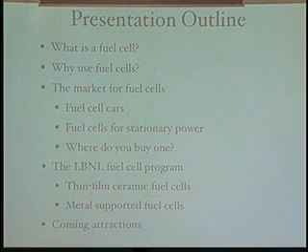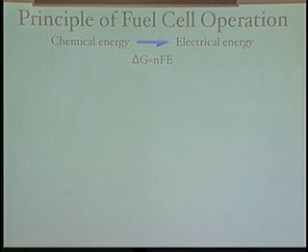So, principle of fuel cell operation. A fuel cell converts chemical energy to electrical energy, and you can calculate the voltage of a fuel cell based on the thermodynamic driving force for that chemical reaction. The basis of any fuel cell, and actually any battery, is some kind of an ionically conductive membrane that separates the two electrodes. That membrane can be solid, liquid, or polymeric. The large attention being paid to fuel cells right now in the press is largely focused on polymeric or PEM fuel cells, which are supposedly going to go into cars. We work on solid fuel cells, high temperature fuel cells here. These membranes will conduct either oxygen or hydronium - the PEM works on hydronium ions, and the solid oxide fuel cell works on oxide ion migration. And of course you need electrodes. The membrane separates the electrochemical reactions, and the electrodes do the charge transfer reaction. That's the fundamental basis of any battery or fuel cell.

Now you need a fuel, and where does that come from? Well, in fact, you can use a renewable. You can start with corn, ferment that, and get methanol and ethanol. Methanol and ethanol have a very attractive property, which is that they're liquid fuels. So people think about using methanol-powered fuel cells, for instance, to recharge the battery in a laptop or power a cell phone.

Okay, but really from methanol and ethanol, ultimately you get hydrogen, and then there's a whole issue of the hydrogen economy, which I'll address somewhat, and some of the problems with the hydrogen economy, and methane.

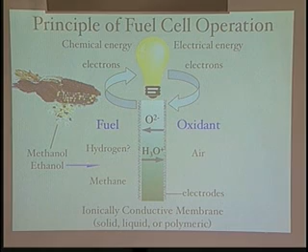The oxidant in the fuel cell is simply air. It's there, and of course it doesn't add any weight, so you've got the air for free. So you need these elements then, and of course you need an electronic path, which then will light a light bulb, turn your laptop on and do what it has to do, run your microwave oven.

Portable power. There are actually fuel cells now under development by a variety of companies. This is actually a German company—they have something called a smart fuel cell. This is a methanol-powered fuel cell. And here's a methanol-powered fuel cell running something like a PDA or a cell phone.

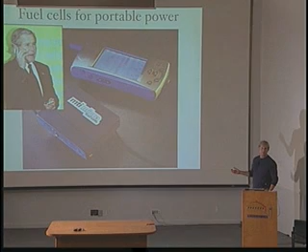And of course, we know that President Bush has kind of endorsed this kind of technology. Whether or not it's real is another question, so we have to look at that. Okay, how new is this stuff? It's not that new, okay?

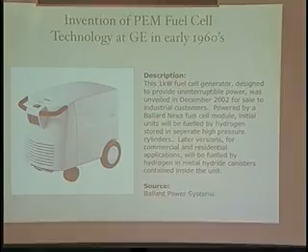So fuel cells for cars, this is it. This work started in the early 1960s at General Electric. And in fact, you can buy now a PEM fuel cell generator, and you can see it right here. This is produced by Ballard.

Interestingly, this is a 1 kilowatt PEM fuel cell. You cannot buy it yourself—they're only selling it to essentially companies, industrial users, corporations. And the reason is because this is still, I think, a very iffy thing, because if you look at the price, it's $7,000 for a kilowatt. And it runs on hydrogen, so none of us have hydrogen piped into our houses. So this is kind of still, I'd say, a demo—something that you install to show that fuel cells can actually do things.

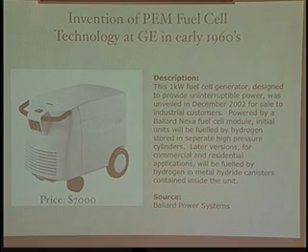Why fuel cells? This is really why we're looking at fuel cells. If you look at a combustion engine, the efficiencies aren't bad, but they're not great either. When you move toward diesels, you get higher efficiencies. And going further, for power generation, it's generally gas and steam turbines, and those scale up to the 100 megawatt size. So this is really also about the scaling of these things as you look at distributed or centralized power generation.

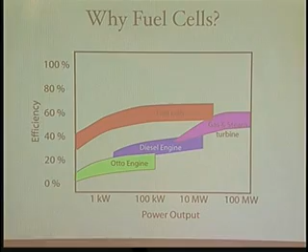And fuel cells have this very large advantage. One is that the efficiency can be much higher, and they scale well down to very small sizes, and they still are efficient devices. Now, the other thing about fuel cells that's very attractive is there's no moving parts, maybe a blower in some cases, but essentially no moving parts. And there's no NOx and no SOx because there's no combustion in a fuel cell, so hopefully there's also minimal maintenance. Now, these things are very attractive.

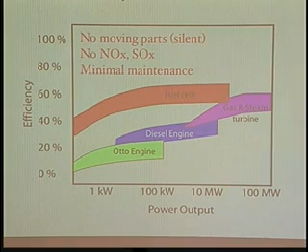Now, the other issue here is that this technology is entrenched, and it's got a very large market, and it's relatively inexpensive relative to what this stuff costs now. So for this to be real, it has to be more than just non-polluting—it has to be affordable, and that is the big issue.

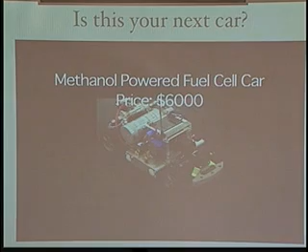So here's a car—$6,000, methanol powered. But as you'll see, it's pretty small. And that's $6,000. So there's definitely an issue here with things like methanol-powered fuel cells, and I'll tell you why these things are so expensive.

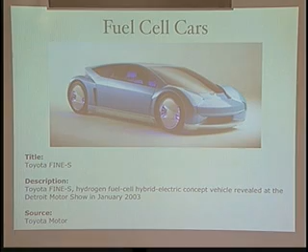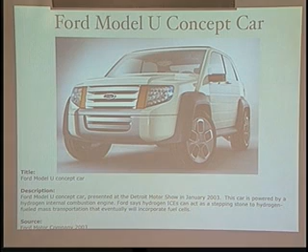So fuel cell cars, right? There's a lot of talk about fuel cell cars. This is actually a concept car revealed by Toyota in January 2003, and this is a fuel cell hybrid concept. Ford has got this—this is actually a hydrogen-powered internal combustion engine, which is also very non-polluting. And leave it to Ford, of course, to introduce a monster car functioning on hydrogen. But it takes a lot of kilowatts to power a car, and you pay a lot for kilowatts when you're buying fuel cells.

So let's see how that translates. Here's a Toyota Camry—it's about 157 horsepower, which is 110 kilowatts. If you look at just the cost of platinum in state-of-the-art PEM fuel cells, it's about $60 a kilowatt.

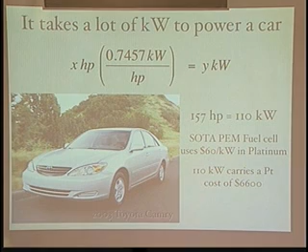That's just the platinum. That means 110 kilowatts is $6,600 just for the platinum, and this is about as low as anybody thinks they can go in terms of the amount of platinum required to do this job, to move these cars and get the kind of output you need. That's not system cost, that's not the membranes, it's not the stack and all the other things. In fact, the system cost is much, much higher. I'll show you what that looks like.

There's also talk about the hydrogen economy. The reason it's necessary for these cars is that they don't run on gasoline. You can't put gasoline into one of those cars because you really have to convert the gasoline to hydrogen, and that's a very complex and costly problem. So the push is, if we're going to have these hydrogen fuel cells in cars, we need a hydrogen economy so you can get the fuel to put in the car. There's a lot of money being spent on this, and there's actually development of infrastructure for hydrogen.

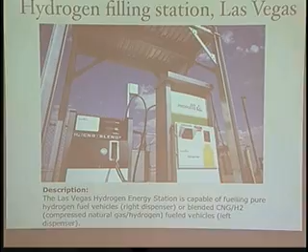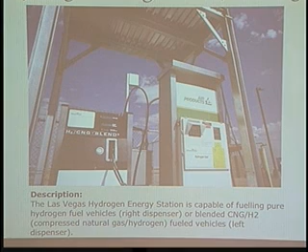Here you see, this is actually in Las Vegas, a filling station. It can dispense hydrogen or compressed natural gas and hydrogen to fuel cell cars, and there are going to be more of these going in the US.

Now, what about the hydrogen economy? You can't talk about hydrogen fuel cell cars without at least touching base on the hydrogen economy itself, which is going to see a lot of funding. But I think a lot of people have started to voice concern about this because of some very basic fundamental problems, just looking at the thermodynamics of hydrogen, the hydrogen economy itself. Ulf Bossel, who runs the European Solid Oxide Fuel Cell Forum, gave a talk last year, and these are in fact his slides. It's a very simple calculation.

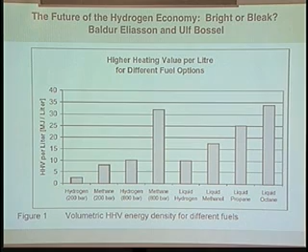If you look at the heating value per liter for different fuel options that could go into fuel cell cars, here's the problem. Here's hydrogen at 200 bars. Methane has much higher heating value, much higher energy content. But you look at gasoline, which is liquid, it's even better. This is liquid without any pressure, just at ambient pressure. Liquid propane, liquid methanol, but hydrogen is way, way down there. There's very little energy content per liter. It's a huge problem, and the problems get worse.

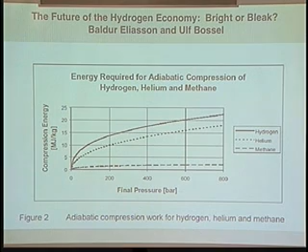If you try to compress it, or even liquefy it, this is the energy required to do that. For methane, the energy required to get up to 800 bars is not that bad, but helium and hydrogen are very difficult to compress. It's going to be very expensive to do this. So if you're going to carry around this compressed fuel, if you want to even call it a fuel, it's really a chemical. It's hard to call it a fuel because of these problems.

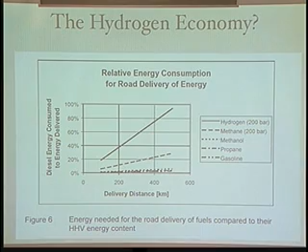These are problems that you can't overcome. That means you can't move hydrogen, basically, and it means that if you're going to use it, it has to be done on site at the filling station. That's a whole other issue, and you can't get around these problems because they're fundamental.

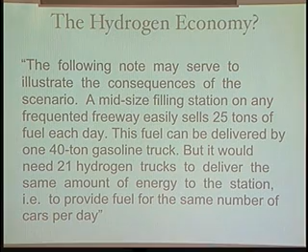There's another way to look at that. If you look at what goes on in the US and also in Europe, a mid-sized filling station typically will sell 25 tons of fuel each day. That can be delivered by one 40-ton gasoline truck. It would take 21 hydrogen trucks to deliver the same amount of energy. So it's a huge issue. The hydrogen economy is not going to happen overnight, and may never happen—a methanol economy maybe, but a hydrogen economy is a real problem.

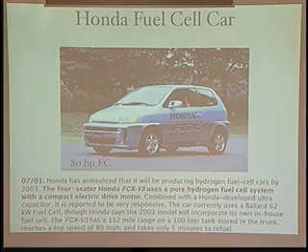Now, where could fuel cells go in cars where it might make sense? There's a lot of discussion about fuel cells being used for auxiliary power. What that means is you have an internal combustion engine, or it could be a hybrid, and you use the fuel cell somewhere back in the trunk. This is actually being looked at by BMW and Chrysler Daimler — a small fuel cell that when you're idling would produce power for the air conditioning, power electronics in the car, and navigation. That makes sense because when you're just sitting there, you consume a lot of energy.

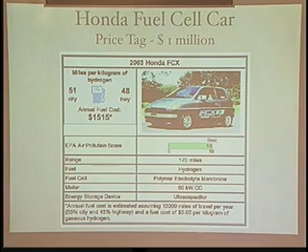But that's probably not going to be a PEM. More than likely, that'll be a solid oxide fuel cell.

There are other alternatives. If you look at the electric vehicle program, there was a lot of money spent on EVs, and those programs are basically gone. There are no EVs really, there's no EV economy either. But the information learned in the engineering of electric vehicles led to the development of hybrids.

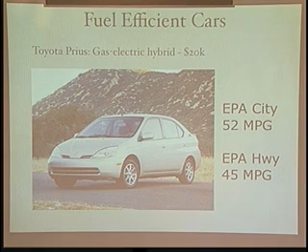Here you see the Toyota Prius — probably many people know this, but the Toyota dealership in Berkeley is actually the #1 dealer in America for the Prius. So these are being sold, it's Berkeley, so that's different too. But people are adopting these, and people seem to be pretty happy with the Prius, and it's $20,000 — it's not $1 million. So this is real, this is real technology.

And there are the new fuel-injected turbo diesels, which also do quite well, and the emissions are low. This can also deliver 50 miles per gallon. Diesel's coming on strong, and they're not very big in the US, but that's going to change.

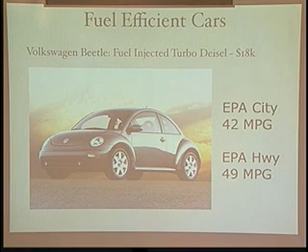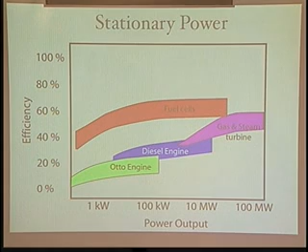Now, what about stationary power? This is probably where we're going to have the biggest impact of fuel cells, and I think this is the most realistic market. Again, it's because you have this large advantage in efficiency — you can build a large fuel cell. You don't need platinum-loaded catalyst because we're going to use something that operates at a higher temperature and doesn't need platinum. So here are your options for stationary power.

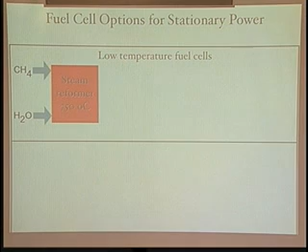There are companies trying to develop PEMs for stationary power. One of the problems is, if you start with methane and water and you're going to steam reform that, that occurs at a fairly high temperature. And PEMs don't like CO — it poisons the platinum because they operate at low temperature. That means you need a shift reactor to remove the CO and operate the PEM at 80°C. So you're reforming at 750°C, and operating it at 80°C — that's a huge efficiency loss. So in fact, these systems don't really have any advantage over the grid in terms of efficiency. It doesn't make a lot of sense.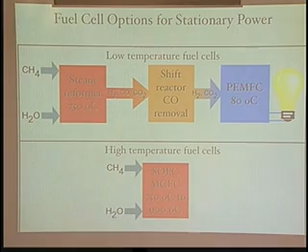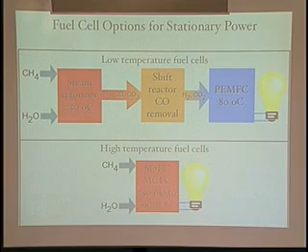If you look at an SOFC though, a high temperature fuel cell, the water comes from the exhaust, and you can see it's directly fed — methane is directly fed into the SOFC, or molten carbonate fuel cell. That's solid oxide fuel cell, that's what SOFC means. It operates at the temperature range where reforming occurs, and these can be quite efficient — efficiencies can be even as high as 70% if it's combined with a turbine.

What's the market for stationary power? In the US, the energy product exceeds $500 billion annually, so it's a big market, really big. And the global market's expanding very rapidly, and in some cases that expansion is being supported by things like coal-fired plants, which can be very polluting. So we'd love to see this market expansion satisfied by non-polluting fuel cells.

Where they'll fit is probably here — it's really the market for new power generation. You're not going to displace plants that are already amortized, already in place. But when countries are putting in new infrastructure, new power plants, that's probably where SOFCs can fit. And that's $17 billion a year, so it's a very large market.

Where do you buy one? Well, they're expensive still, and we'll discuss what the issues are in terms of this cost. If you look at the developers of solid oxide fuel cell technology, the developers are Siemens Westinghouse — used to be Westinghouse, it's now Siemens Westinghouse — and Cummins, the diesel company, is doing it too.

Delphi is developing it for cars, for auxiliary power units. And there's a number of companies. General Electric is also involved, and they have a substantial program.

But the problem is this. If you look at phosphoric acid fuel cell technology, in 1999 it was $3,000 a kilowatt, and it was fairly mature then. It was discontinued at $3,000 a kilowatt. It's too expensive, and the reason it was discontinued is that they saw no way in which they could drop that cost.

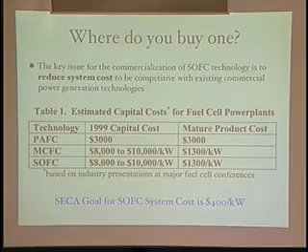So everybody projects small numbers for the future: 10 years from now it's going to be very, very cheap. It's very easy to say that because 10 years is 10 years away. But the question is, how do you get from there to here? Actually you'd like to go lower than that, because then you can really compete, and that's what's going to cause this technology to get adopted. Ultimately it's the price of electricity that people care about. Even if it's green, if people have to pay twice what they pay now for electricity, they won't do it.

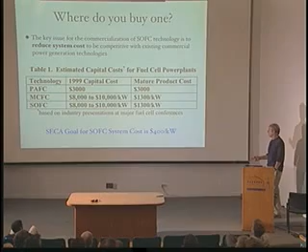So the goal, SECA is a DOE program. The goal for the system is $400 a kilowatt, and it's $400 a kilowatt because that's what you buy diesel generators and gas turbine systems at.

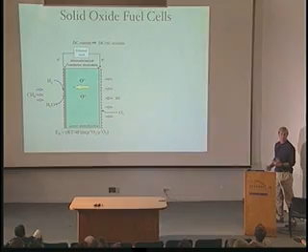So what's a solid oxide fuel cell, and what are we doing about it at Lawrence Berkeley? Ultimately, fundamentally, it looks like this. You have, again, this is a ceramic membrane. Typically, we have a thick ceramic membrane which conducts oxide ions.

You have a driving force across there, which is really the difference in PO2 across this membrane. On one side, you bring in methane. On the fuel side, you're actually producing water, consuming oxygen, producing water on this side, and that water reforms the methane to form hydrogen in situ. So the hydrogen, all this reforming happens in the SOFC. We don't need a separate reformer. So that's all great.

But these thick film devices, the thickness of this plate was typically 200 microns. Because of the resistance of that plate, the temperature of operation was limited to 1,000 centigrade, and that's pretty high temperature. At 1,000 C, if anything can happen at the interfaces, it will happen, so you have to really engineer these electrolyte interfaces well, otherwise you get degradation. 1,000 C also means you can't use metals, very difficult to use metals. But you'd like to use metals because metals are much easier to form and machine.

Now if you look at the polarization or the losses in a device like this, electrochemical device, there's an IR term or ohmic term, which is basically the resistive drop across this membrane. There's a charge transfer term, which is essentially what's happening at the electrodes, having to do with how fast that reaction occurs. And there's what we call a mass transfer term, which is how fast the gas goes through the electrode. At these temperatures, that's generally not a problem.

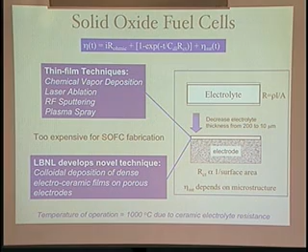It's very, in some sense, it took us a while to get there, but it's very simple. We call it colloidal deposition. And we can make all sorts of electroceramic films this way. And it goes like this.

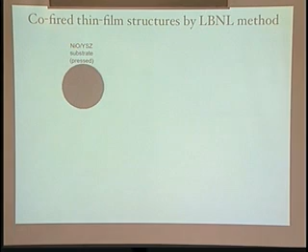You start off with an electrode. The electrode for an SOFC is typically nickel. So you start off with nickel oxide, because when it's in the hydrogen environment, it'll be reduced to nickel metal. So you start off with a very simple thing. You kind of press this, make a tube. You can do all sorts of things. And we actually give it a pre-fire to give it some strength.

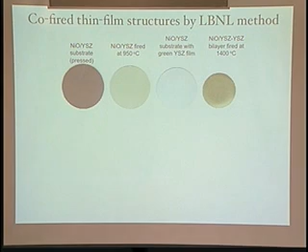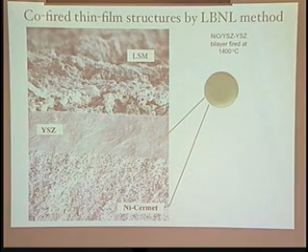And then, this is just, in fact, it's hard to see, just with an artist brush, but it's basically like a paint spray. We spray down a thin film of zirconia. And that is then fired, and what you see here, that is actually an SOFC. And if we look in cross-section, this is actually a scanning electron micrograph, this is the zirconia film, and that is about 15 microns thick. And you can see it's perfectly dense, and it's sitting on top of a porous electrode.

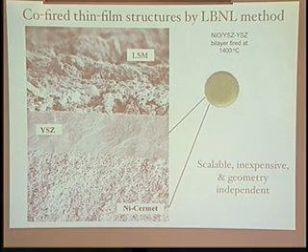This is where the hydrogen comes in. And this is the air electrode. And this technique, it's scalable, it's inexpensive, and it's geometry independent. So you can see just at LBL alone, we can make squares, circles, plates, in fact, tubes.

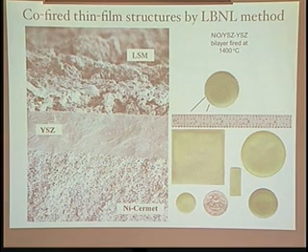That's all great. And the performance of these devices is actually pretty stunning. So when we started testing these things, we saw very quickly that the performance was actually better at 800C than the performance of fuel cells operating at 1000C, because they had very thick electrolytes. So if you see here at the very top, this is, in fact, at the time we did it—it probably still is—a world record for peak power density. It's the highest power density anyone's ever seen for an SOFC. It's now been duplicated by a number of other labs, but of course we were the first.

And you can see that—oh, excuse me, let me turn that off. My son loves to put odd ring sounds on my cell phone.

In any case, you can see here from the current densities, these are really extraordinarily high current densities. If you're familiar with battery technology at all, typically you run batteries at a few milliamps per square centimeter. These are thousands of milliamps per square centimeter. There's a lot of mass going across this thing. So it's pretty stunning. And it's 800C.

So it just doesn't want to stop. Hold on, I'm just going to have to turn it off. Give me a second. All right, die—it's dying.

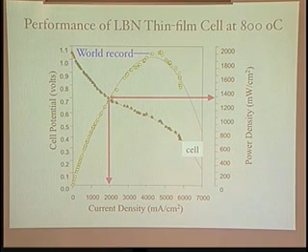Okay, now, importantly, when we got to this point, we saw that we could get the power density, we could bring the temperature of the SOFC down. The question is, now what's going to drive the cost? Because ultimately, if we're going to transfer the technology from Lawrence Berkeley to a commercial developer, they have to actually make a real commercial product out of it.

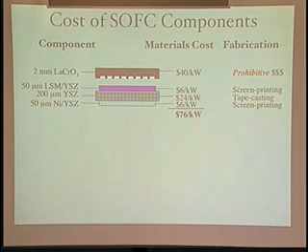So we started looking at the costs of all the components that went into this new configuration where we have a thin film cell. Now, here's the original technology, what we call conventional technology, where you have this 200 micron thick plate, and you screen print on electrodes, and they used something called an interconnect. And what that is, if you have a flashlight and you stack batteries, you're series connecting those batteries to build the voltage. And fuel cells are the same way. You have to series connect them to build up hundreds of volts because they run at about 0.7 volts apiece. So this is the interconnect.

It was typically made from something called lanthanum chromite, which is a conductive ceramic. If you add the costs up, this is the dollars per kilowatt for just raw materials. And that's not too bad, because remember, the target cost is $400 a kilowatt. The problem is, these are actually flow channels. The hydrogen and the air have to come into this device and run across the electrodes. And to make a machined ceramic is very, very expensive. It's not like machining metal—it's actually quite expensive. And so this has largely been abandoned because of that cost.

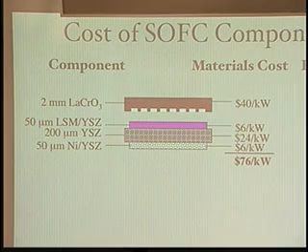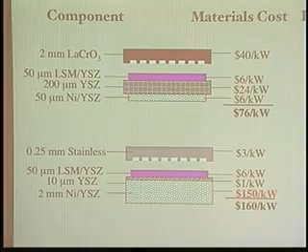So that's all great, but the problem comes in here. This is nickel and zirconia, and they're very expensive—the raw material cost is very high. So now you've gone from this to here. You don't have any expensive fabrication on the right side, but it's too expensive. It's going to be difficult to commercialize such a thing.

Now you could ask, why don't we make this thinner? It's because that's where the strength of the cell comes from. That plate has to be stacked and has to be sealed. If you go too thin here, it has no strength, and it'll break. And these things do break.

So the target cost is $400 a kilowatt for the system. That means the stack—because the system has more than just these components, it has power electronics, it has what they call plumbing, things like that—means the stack really has to check in at less than $85 a kilowatt for anybody to truly commercialize this in a meaningful way.

So there's the Westinghouse approach also, Siemens Westinghouse. That's a very large effort, by the way, and it's a very slick approach in that it's tubular. They make tubes, and tubes are nice because the seals are much easier, as opposed to these square plates which have to be sealed on every edge. They just have a seal on the end.

The way they do that is they start with an air electrode, and they do something called CVD-EVD, a vapor deposition process. It's really expensive—it's a batch process and tremendously expensive. Even this, what's called an interconnect, is put down by plasma spray. It's fine for thermal barrier coatings for turbines, but again, it's too expensive for fuel cells. So this approach becomes very expensive. It's also the most advanced.

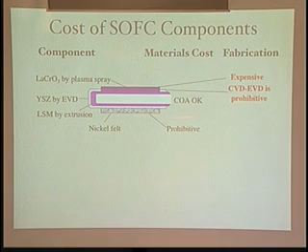So what are we doing here? A few years ago, Craig Jacobson and our group came up with a very unique idea, which was to take this thickness of the nickel YSZ and replace it with stainless steel, because most of that thickness was there for mechanical support. And it's kind of foolish to spend a lot of money on something that's merely supporting the structure when you can use stainless steel.

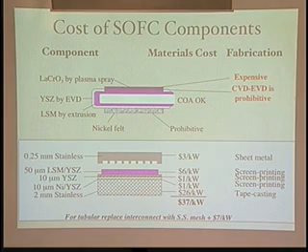It's not trivial how you build this thing, but if you look at the cost implications, now you have something that's $40 a kilowatt—very inexpensive, but more importantly, very strong. Because instead of the structure being based on ceramic, it's based on stainless steel, which is very strong and very electronically conductive, and it will survive quite well at these temperatures. So this is the basic concept of where we're heading now.

So what we had to do then is go from this structure to something like this, and of course we did it—that's what you're seeing. What it meant was replacing... this zirconia film stays, that's the 20 micron zirconia film, a little thicker. But now what we've done is this electrode, which was in fact millimeters thick, is now just a very small section, about another 20 microns, that gets put in between the steel and the zirconia.

So the bulk of that mechanical support is now replaced by stainless steel, and this is a very tough, very durable structure. You can literally hit these with a hammer, as opposed to this structure, which if you dropped it from a distance of a few feet would shatter—and that's a problem in terms of building fuel cell stacks.

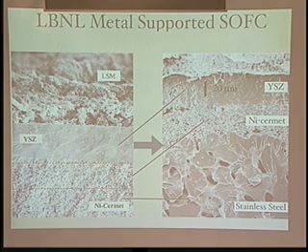This is very tough. But anytime you go from a somewhat conventional system to a new system, you introduce new interfaces. There's an interface here that's new, and this interface is the same, but this interface is brand new—stainless to the electrode. And so there are bound to be some issues, and that's largely where our research is focused.

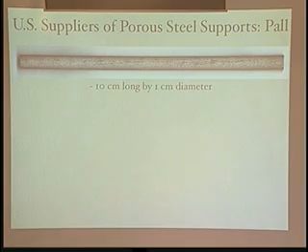Now, what about these steel structures? Is there already technology around that we can borrow from? In fact, it's really like a filter, like a stainless steel filter, and there are plenty of suppliers in the US and abroad of such structures. This is just a stainless steel tube used for a filtration membrane, and you can see that the pores, in cross section, are actually exactly what we want for a solid oxide fuel cell. So we are now working with companies like Pall and Amatec, that supply stainless steel powders, and they're very excited about the possibility of going from simple filtration technology to energy delivery.

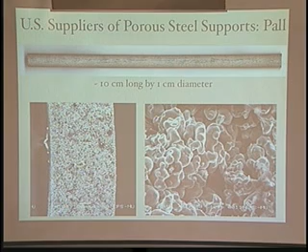We have another approach in addition to what we call the co-fired approach, called post-fired bonding. This is exciting because it would allow developers of fuel cells that already have in-house processing to adapt this new technology. Many fuel cell developers start off with a nickel YSZ electrode, with a thin YSZ film on top of that - that was essentially developed at LBL.

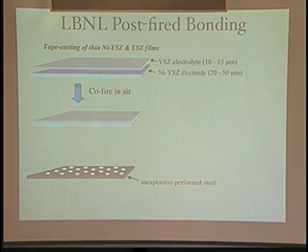But this would be thick. Now we take these components, make them quite thin, and reinforce them with steel. We co-fire that structure and make this laminate. It's going to be fragile, so you won't be able to build a stack with it, so we introduce strength by bringing in steel. The steel can be like perforated steel, which is used in everything and is ridiculously inexpensive, or we could use just porous stainless steel. Either one would work. What we need to do then is just braze - we put a very thin layer of some kind of braze on the steel and on the fuel cell.

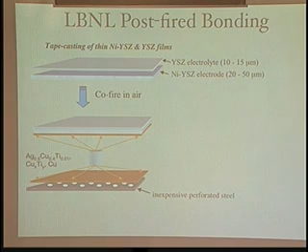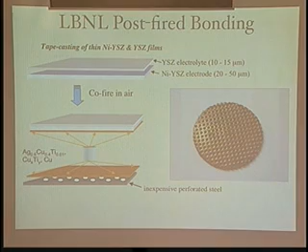So we have a braze layer. We move that over, and now on both sides we introduce stainless steel with this braze and bond it to the cell - that's what that thing looks like. I'll show you in cross-section: that structure is now bonded to steel, and it's very, very strong, very conductive. If you look at the edge view, there's your fuel cell. So instead of a fragile ceramic device, you now have a porous stainless steel support on both anode and cathode, and you can make current collection easily by welding to either of these structures.

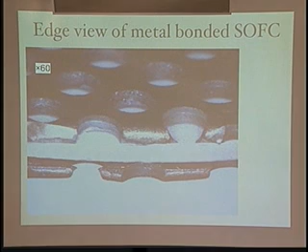So you have fuel and air, and you can see that the thickness of these components is about 500 microns here, for the whole cell, and same here. This structure you're seeing here is the ceramic fuel cell - if you expand that, that's what's in there. So now we have the solid oxide fuel cell encapsulated basically between steel supports. This is a very, very tough, strong structure, and it'll be very inexpensive and easy to put into a stack and build SOFCs from. So this will meet all the cost targets we need to meet.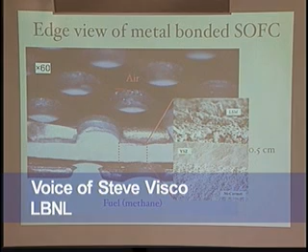The question is, what's the longevity of this structure? We don't know yet - we just started building these things and are just starting to test them. But if it works, if there are other problems to solve, the advantage here is we're solving the right problems, because if we solve them, the materials used in such a structure can meet all the market demands in terms of cost. You end up with something you could put into distributed generation, home fuel cells, and we're working with other companies to do precisely that.

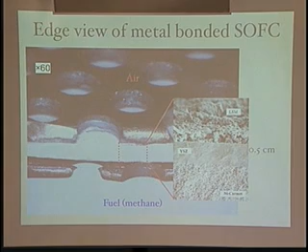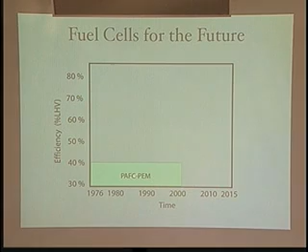So in terms of fuel cells for the future, I think it's just about right. If you look at some kind of timeline - and these things are really hard to predict - phosphoric acid, PEM. Phosphoric acid has actually already been discontinued. The efficiencies weren't bad, they were getting upwards of close to 40% efficiency, but the cost was really too high. And PEM, there's a tremendous amount of PEM.

When I say PEM, that's proton exchange membrane. It's the fuel cell going into the Honda fuel cell car. It's also a fuel cell that Toshiba's talking about for laptops.

It has some problems. Cost, in terms of distributed generation, is going to be a huge one, and you're never going to get the cost out of platinum. Platinum's platinum—you don't get any economies of scale there. In fact, it'll go the other way: if there's higher demand for platinum, it'll get more expensive because it's scarce. So I think there's a limited time span for that. Then there's the solid oxide and molten carbonate fuel cells.

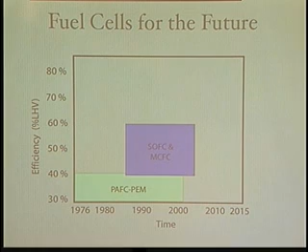They're both too expensive now, but there are no raw materials in these systems that preclude commercialization. So it's now a question of engineering, and making sure the people developing these things aren't just building large demonstration units, but keeping an eye toward the real market, which is to compete with gas turbines and diesels.

Then ultimately there are these hybrid SOFCs, where you get into very high efficiencies—combining fuel cells with gas turbines, using the fuel cell as a kind of pre-combustor for a turbine. You can deliver energies in excess of 70%, very high system efficiencies. And there's talk that with cogeneration, using the waste heat of these 21st century SOFCs, you could approach 80% system efficiency. That would be great, if we can do that.

There's reason to believe it's possible, but all of this is going to be driven by cost, because it's the cost of electricity that, in the final analysis, has to be competitive.

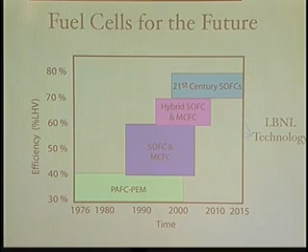LBL, what do we fit in these three boxes? What we're developing here could fit into all these systems, and we're talking to and working with a number of developers on this.